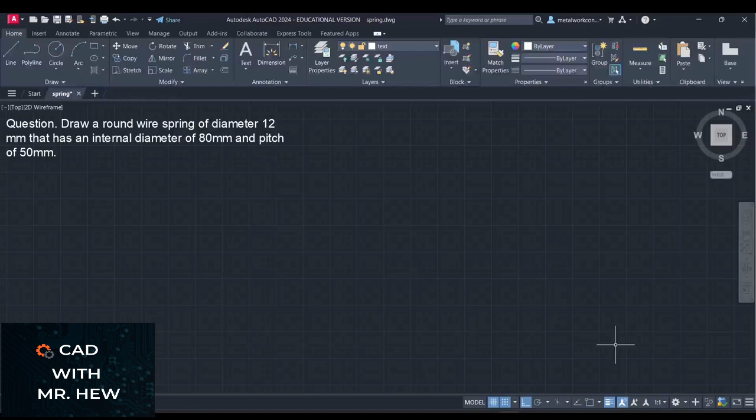Welcome to today's video. In today's video, we'll be drawing.

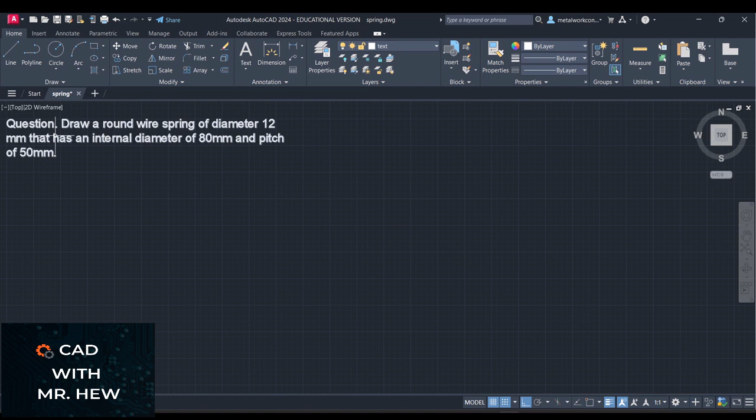We'll be drawing a round wire spring of diameter 12 millimeters, with an internal diameter of 80 millimeters and a pitch of 50 millimeters. Can you guess what other information I need to add to this question? So we have the diameter of the wire spring, the internal diameter of the spring, and the pitch of 50 millimeters.

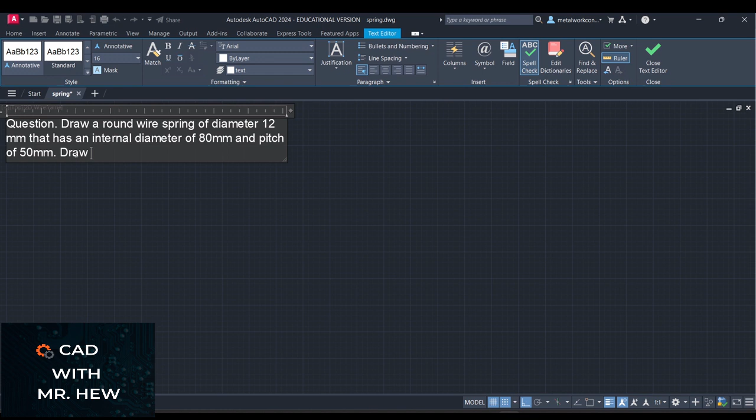To see the three-dimensional effect of the spring, you have to draw at least two pitches, so we're gonna draw three pitches. So draw three pitches for the spring, good.

Now, in today's lesson, we'll be looking at the round wire spring. In the previous lesson, we looked at calculation of area for those who are doing CAPE.

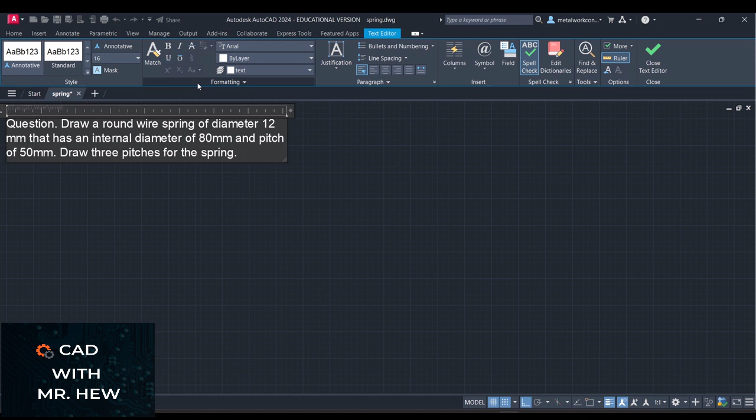All right, so we're gonna start. The first thing that you're gonna do is to draw the inside diameter of the round wire spring, because the spring would be the cylinder that it fits on, when they are making it, or even after if they're finished making it.

You know those press button pens, when you press a button, the pen retracts in and out. The spring, the diameter of the refill ink, the plastic container that holds the ink, the spring would fit on that pen cartridge. So the internal diameter for the spring would be the outside diameter for the pen cartridge, the thing that holds the ink.

So we're gonna start off with our cylinder. All right, so we're gonna go line, and the diameter is 80, so we're gonna set out 80 here.

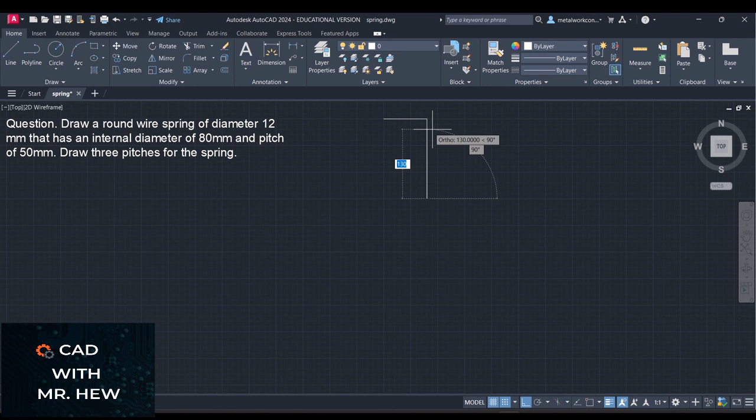Then again, the diameter was 80, and then we're going up back 150 because we have three pitches.

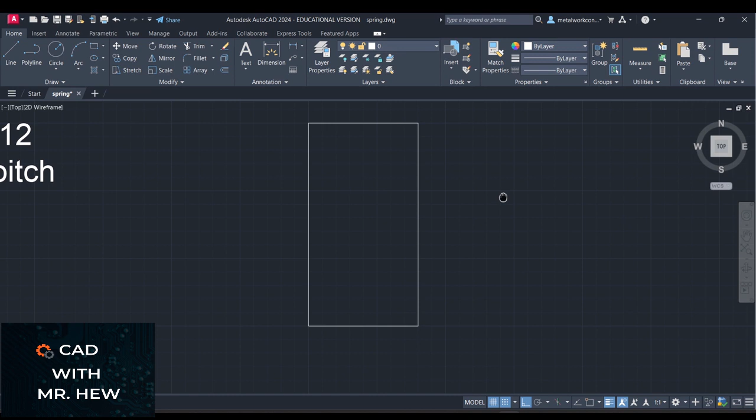So now that we have established the cylinder that it's going to fit on, we need to now draw the plan. The plan would be, what shape would be the plan for the cylinder? Can you guess? It will be a circle.

So we're gonna draw a construction circle. The diameter is 80, so the radius is 40.

Now the next thing you're gonna do, you're gonna add the construction circle to represent the diameter of the spring. So the diameter was 12 millimeters. Looking on the drawing, we're gonna change the diameter of the spring.

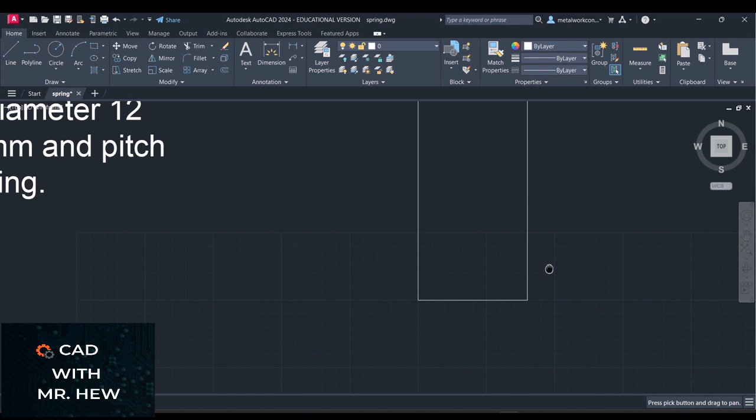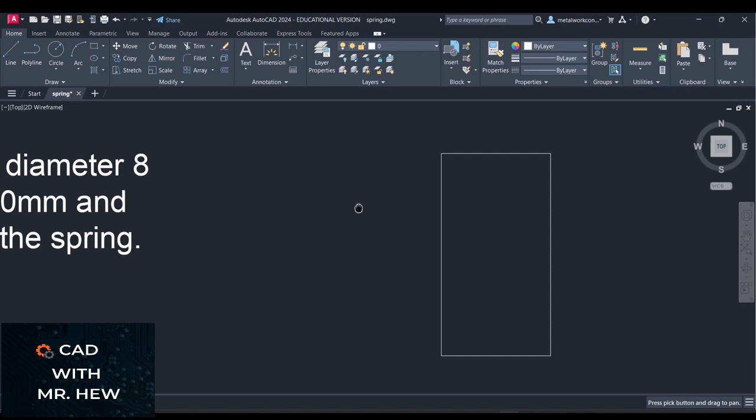Let us change it to 8 millimeters, is that okay with you? I'm gonna change it to 8 millimeters. Let's move this pan over and come back to the drawing. We're gonna draw it 8 millimeters.

We're gonna go line through the center. We're gonna draw a circle right here, and we said the diameter was 8, so the radius would be 4, is that so?

The circle is diameter 80, so the radius is 40. And what would be the radius of the center for the small circle representing the wire spring? If the diameter of this circle is 80, and the diameter for the small circle is 8, how far away would be the center of the small circle from the center of the large circle? I'm gonna pause a little bit and let you answer.

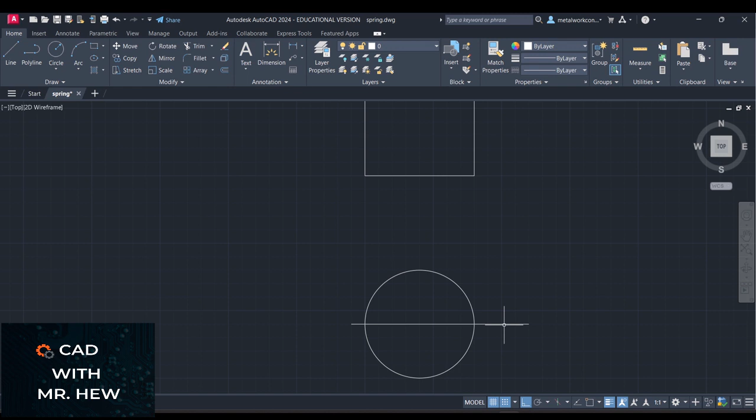All right, the answer would be 44 millimeters from the center. Isn't that correct? Maybe so, we'll see.

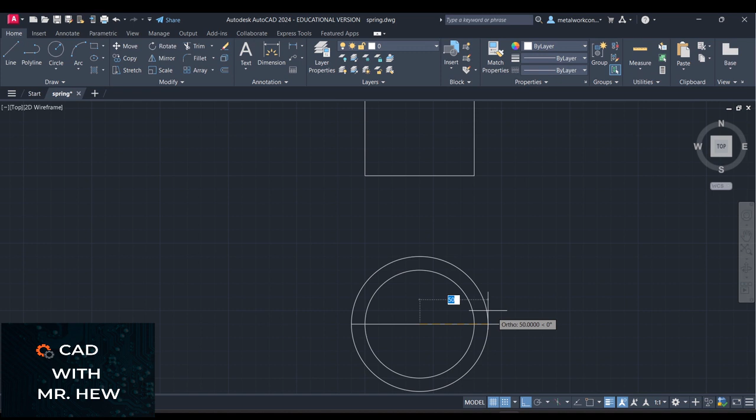So we're gonna draw a circle here at center, and the radius must be 44. Let's check it to see if it's correct, I'm gonna check if your answer was correct.

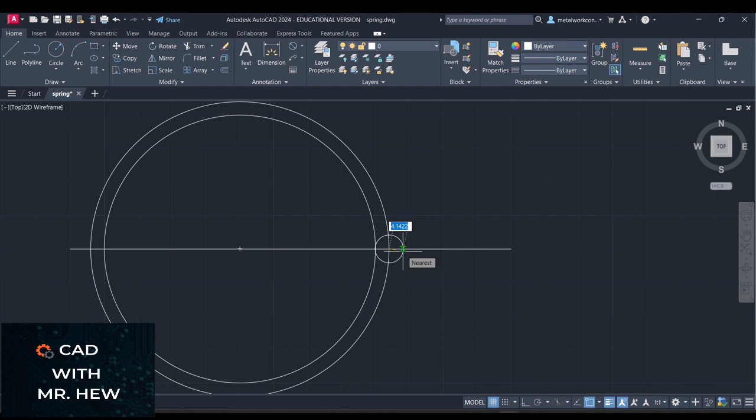So we're gonna draw the circle now, the construction circle to represent the wire spring. So the circle that I drew with radius 44 millimeters from the center, that would be a construction circle to give us the center of the circle. So we have located the center of the circle, so we're gonna go now circle, and the radius, specify the radius, it would be 4 because the diameter is 8.

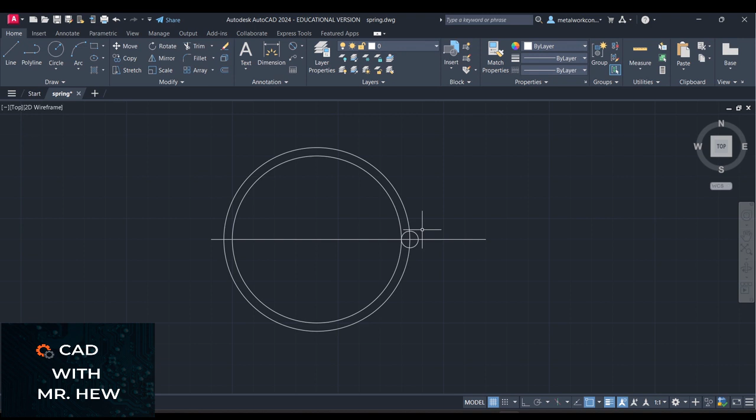The next thing we're gonna do, we're going to cut up the outer circle into 12 equal parts, and you'll see what I mean. Here we have our circle in the plan, and we have divided the circle into 12 equal parts. The outer circle represents the center line for the circle of diameter 12 that represents the round wires that will be used to form the round wire spring.

I've changed the diameter back to 12 millimeters so that when we draw the end of the round wire spring, I can show you a little bit better what the end of the spring would look like when you cut it, assuming the spring is made from a long spring and then cut. The larger diameter lets me show you more clearly. At the end of the video you'll see what I'm talking about when I show you that part of the spring. That's the reason for enlarging it, so you can see it a little bit more clearly.

All right, so we have our outer circle, and as I said, it represents the center line for the circle of diameter 12 millimeters. So what was the radius of the circle? Pause the video, and when you come back in another 30 seconds, I'll tell you my answer, and you can see whether your answer was close or a little bit off.

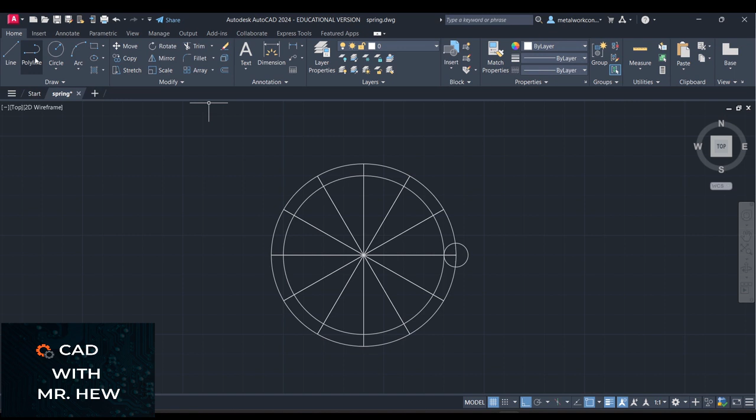All right, so we're going to draw a construction line from each of these points. We're going up, enter. We're going to repeat the same process again.

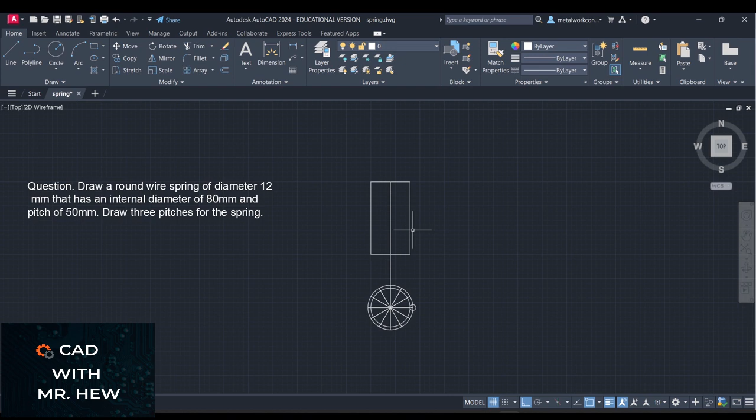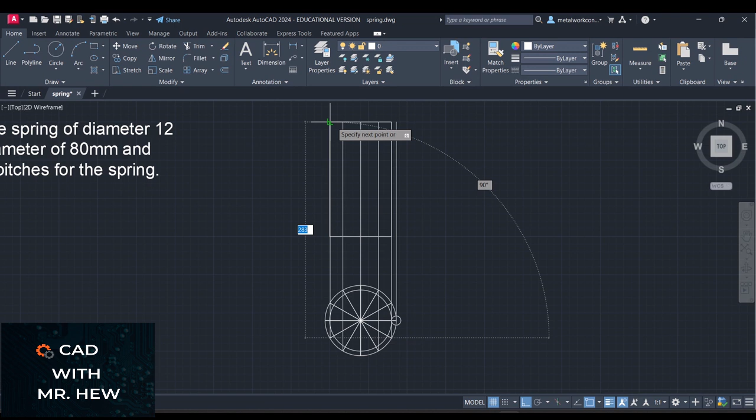So from the plan, we're going to draw construction lines going towards the front elevation, plotting these points. So there, there, there, this point, going up, enter. Go again, there, going up, enter, there, going up, enter, there, going up, enter.

Good job. Did you get yours correctly drawn? Let me go up and see the top of mine. It looks a little bit tall, the last one, but we can correct that.

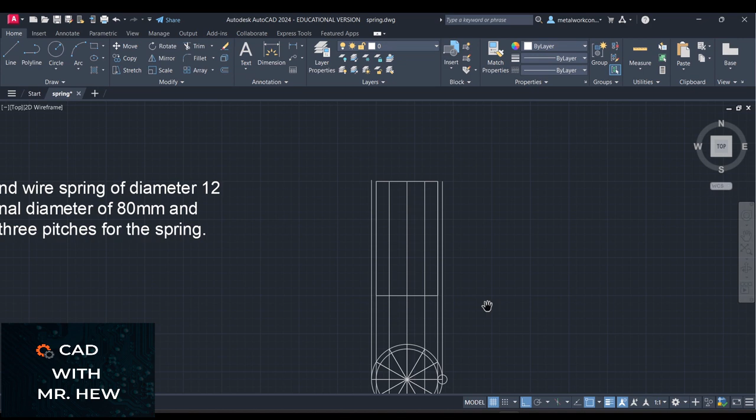All right, so we have our construction lines going up. The next thing we're going to do is set off the pitch, the three pitches, so that we can plot the points. Is that okay? Good.

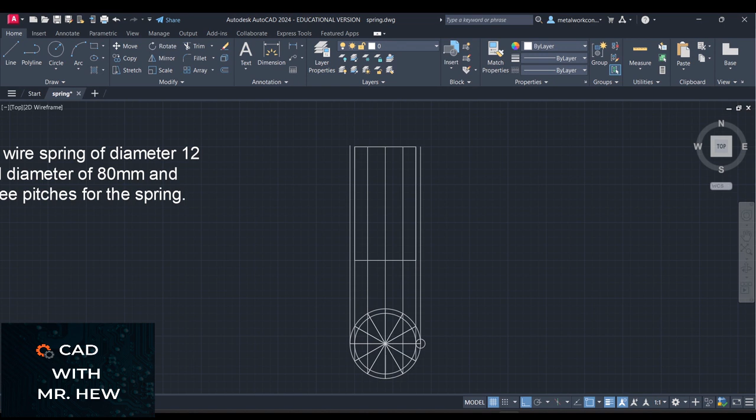Okay, we have set out our three pitches and I've measured the first one so you could follow a little bit better. If you wanted to see the question again, here it is. All right, so the question is on the left, and we are constructing a round wire spring.

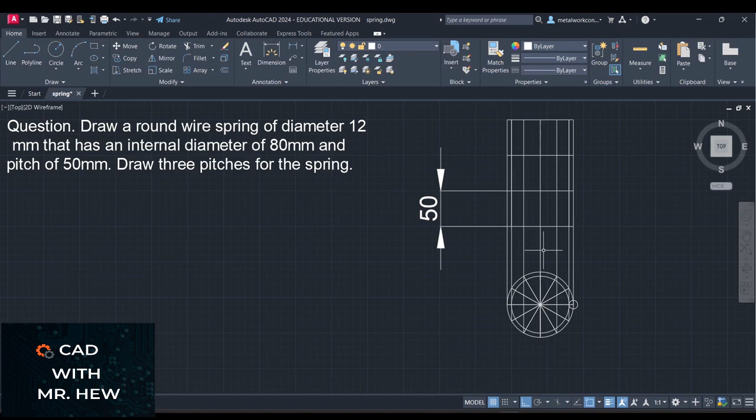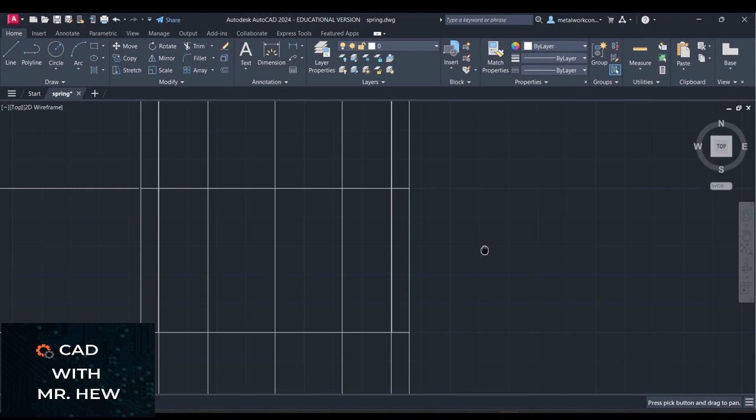All right, so let's zoom into the drawing. The next step, we're going to divide the pitch into 12 equal parts, okay? All right, I'm going to show you in a few minutes what we'll be doing.

All right, so what you're seeing on the screen is that I've divided the pitch, one pitch, into 12 equal parts. It's also showing the plan with the construction circle for the 12 millimeter diameter wire, and the center lines plotted going up towards the front elevation. We're going to plot the front elevation, the center line going around for the wire.

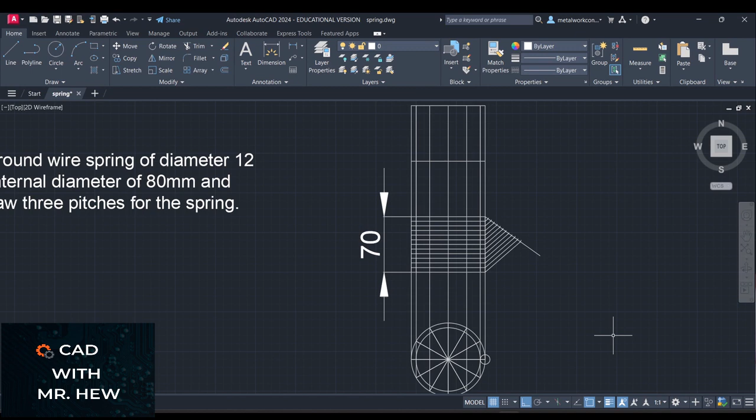Let us do that now. Right here we have the circles going around to represent the wire going around. We're also going to plot the points at the center line.

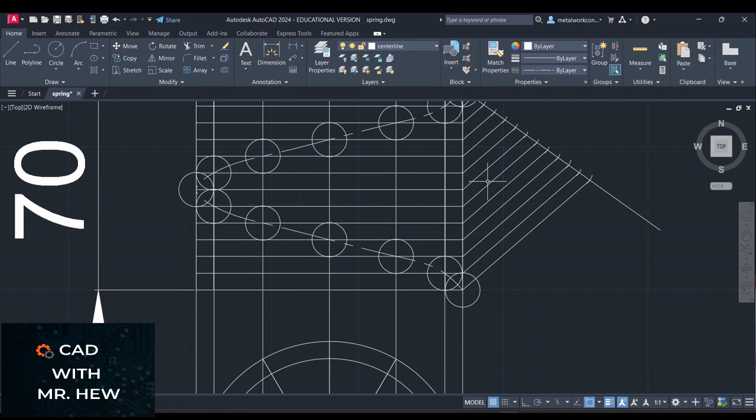You should have done this first, but it doesn't matter, the end result will be the same for this particular question. Enter, all right, so there we have our center line going around.

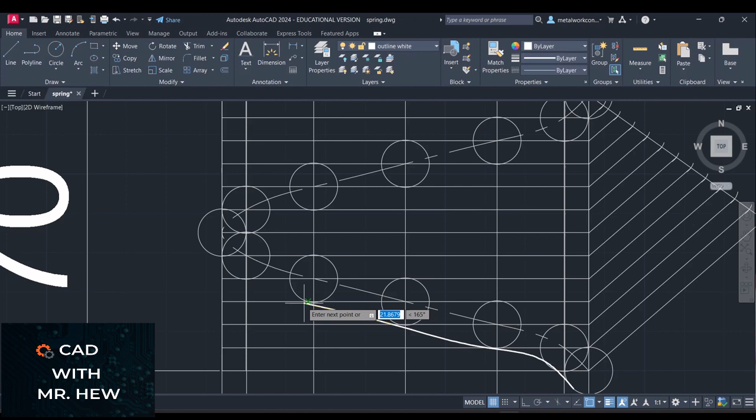All right, so the next part, we're looking for the point of tangency on the first circle. We're going to center the drawing so we can see all the circles. Point of tangency at the first circle, second circle, third circle, fourth circle, fifth, sixth, seven, still at seven, going tangential, we're going to turn and go towards the right.

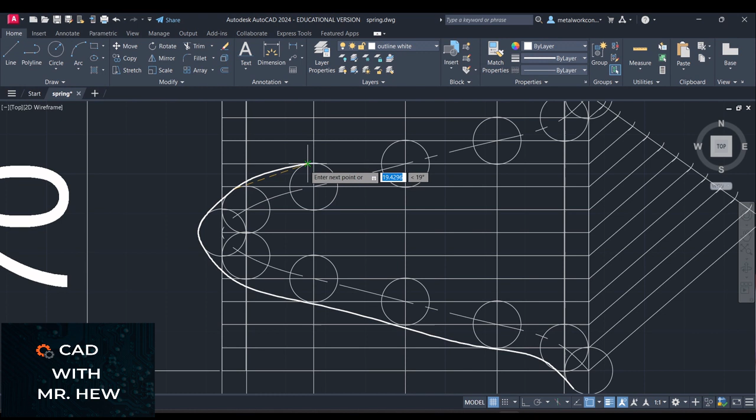Circle number 8, circle number 9. We're zooming in so we can see the point of tangency clearly. The next construction circle. I'm going to the next one, looking for the point of tangency.

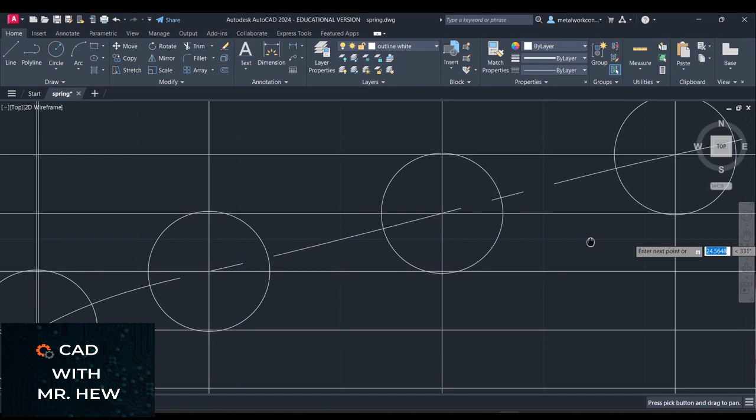We're moving the drawing so we can see the last two circles. We're almost finished, on the second to last circle, and now going to the last circle. This would have completed our outer curve for our round wire spring. The curve looks smooth.

We're going to close off the curve, end the curve right at the point of tangency as shown on the screen. There it is. So we have completed the outer curve. We're going to center the drawing so we can see the points clearly.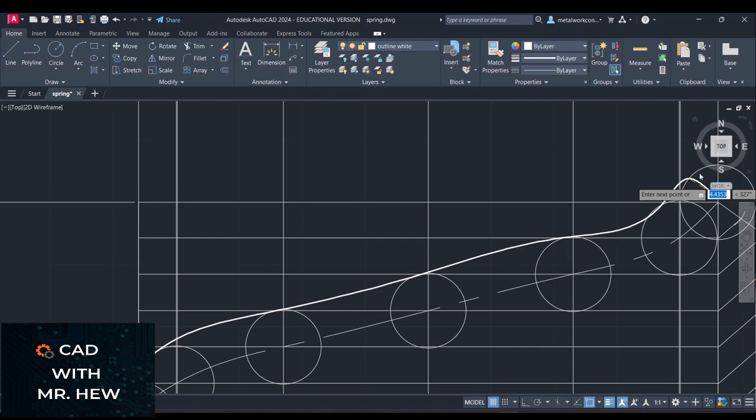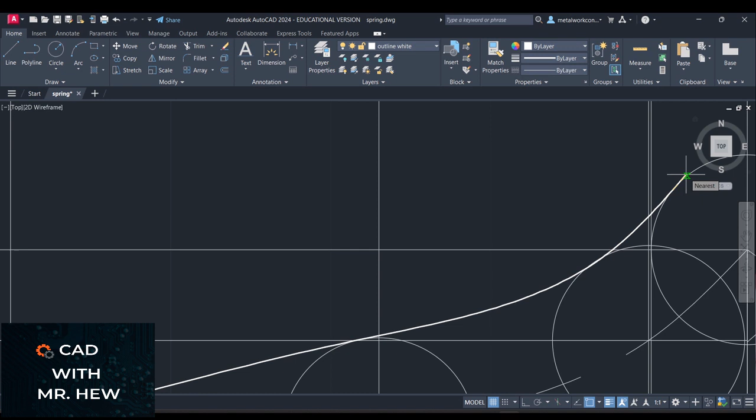We'll be finishing up the outer curve on the last circle for the first pitch. The curve is looking smooth. We're just going to close off the outer edge for the round wire spring. There's a curve, and it has smoothed out.

We're going to center the drawing so we can see all the construction. So there we have completed the outer curve for the first pitch. We're going to plot the inner side for the spring.

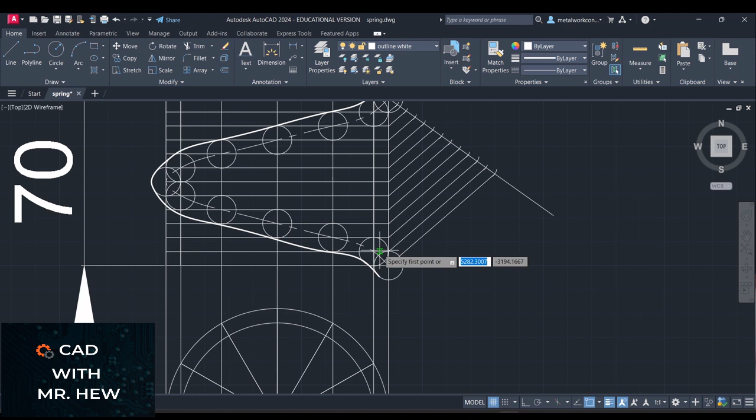Tangential at the first circle, circle number 1, we're doing the inside curve. So we go circle 1 and 2. Zooming in so we can see our point of tangency. Circle number 1, 2, 3, circle number 3, then 4, then 5, circle number 5.

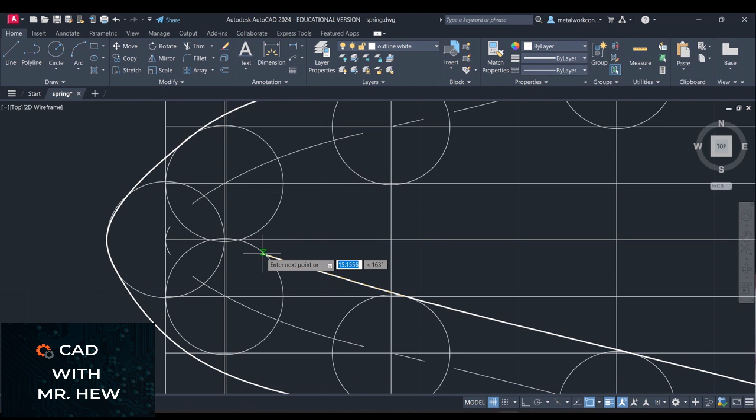We're going to move the drawing towards the right so we can go up to the other circles. So we are at circle number 6 and 7. Going up to circle number 7. Circle number 7. Yes.

We're going back now to circle 8. Circle number 8, tangential, point of tangency. See that, circle number 8. Zooming out so we can see the other circle that we're going to, which is 9.

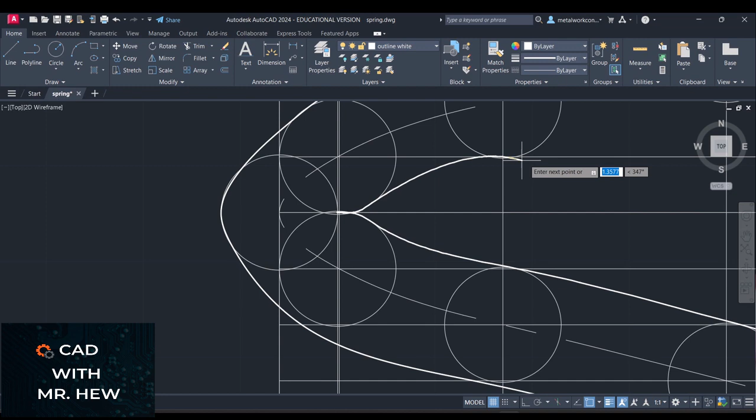Then we're moving on to circle 10. We're zooming out so we can see the next circle, then zooming in so we can see the point of tangency. We want to move the drawing over to the left so we can see the next circle. All right, so there it is. We have picked up that point and moving to the next circle.

We are almost at the end of the last circle. Right there would be the end for the inner line, inner curve for the round wire spring. So we're zooming out to check the drawing. Yes, and we have one pitch. It is complete. There is our wire spring.

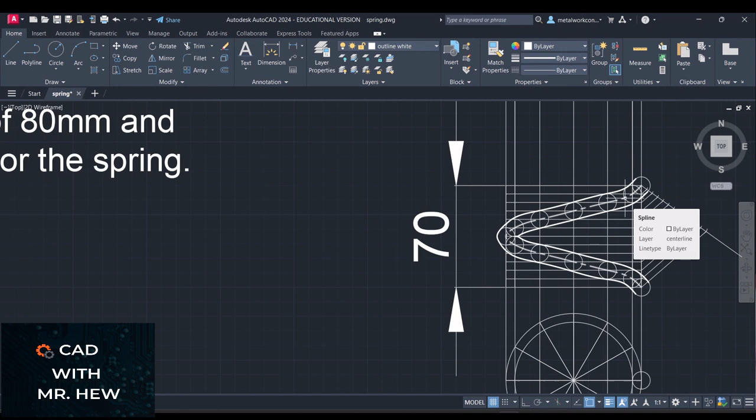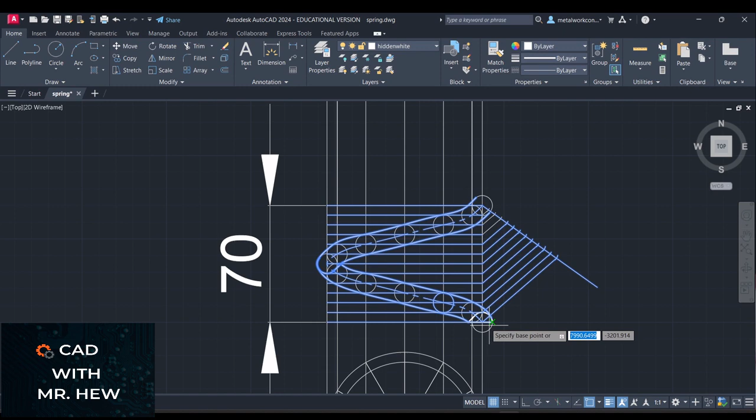Now what I have to do is correct the end, down here. So we have selected the first pitch. What we're going to do is copy it to the other pitch location. So we're going to come here, copy.

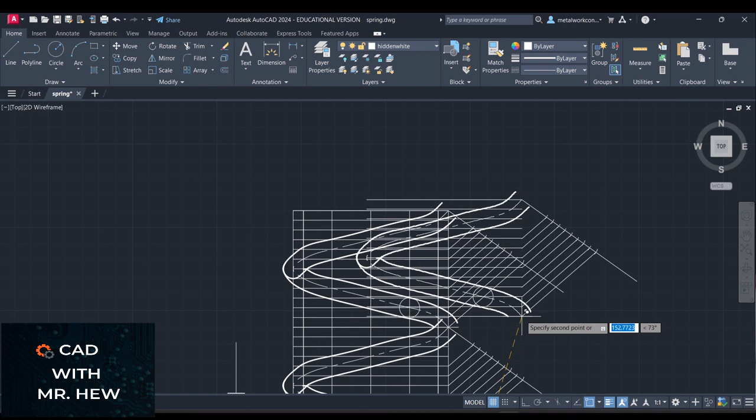Copy, enter. All right, so what I need to do now is get the circle that was down here. So I'm going to copy this circle. Let me fix the circle first, then I'll copy the curve there. So we're drawing our circle, the same radius as before.

Now we're going to trim the excess because we just needed the arc. Are we going to zoom out? We're going to zoom out to see the effect of the curve.

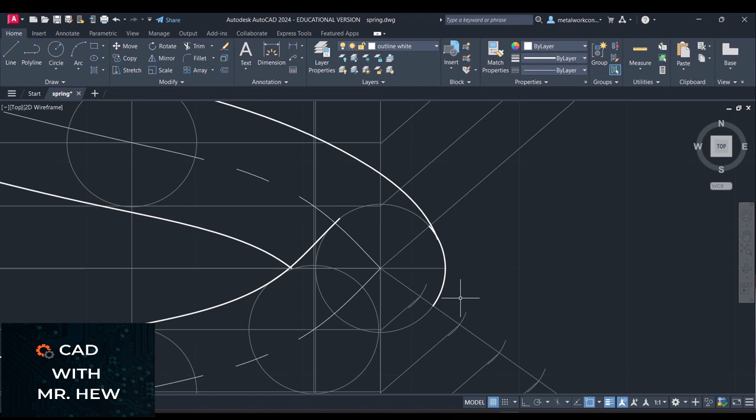There is a completed arc. We're going to trim and remove the part of the circle that we don't need. The dark part of the circle was for the little gap that was there. We're going to close this gap now. All right, this is aligned and good.

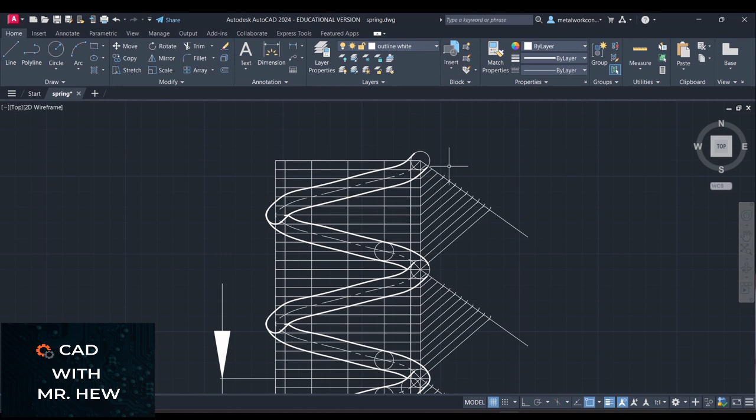All right, so we have fixed the corner now. We're going to finish completing the corner, which we didn't pick up in our copy. Enter. So we started there.

We're going to see a circle here. Depending on how it is cut, we're going to see a circle up there. Okay, we're going to put a circle up there. So we're going to draw a circle here.

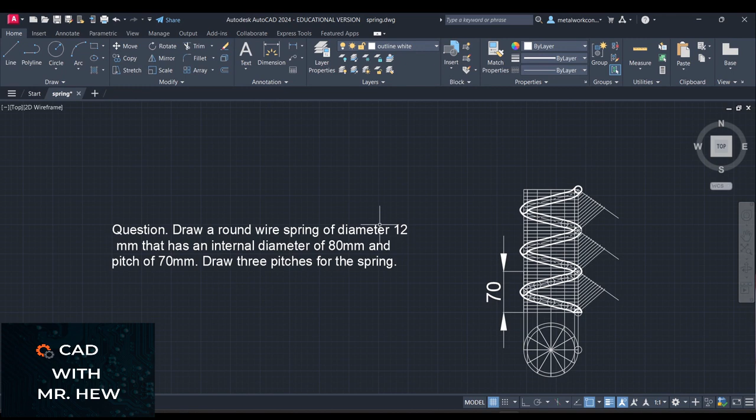This is all round wire spring. So the pitch is 70 millimeters, the internal diameter is 80, and the diameter of the rod is... right, so we're going to label it up. Is that circle?

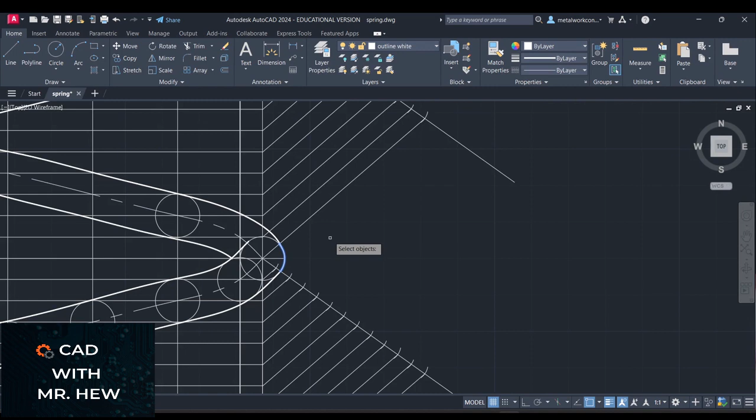Copy, enter. Enter. Yeah, good. All right, so we're going to label it now. We're going to label the text. Label this wire diameter. This is wire diameter.

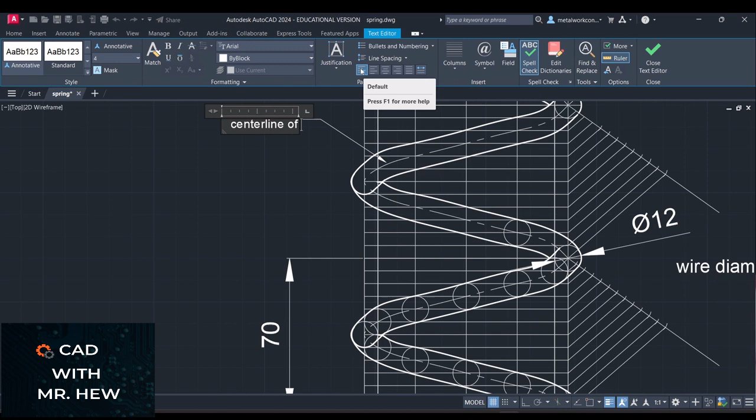So the question was to draw a round wire spring of diameter 12 millimeters that has an internal diameter of 80 millimeters and a pitch of 70 millimeters, and we were required to draw 3 pitches for this spring.

Here is the solution on the right. I hope that you were able to complete your drawing. Let me know your thoughts about the video.